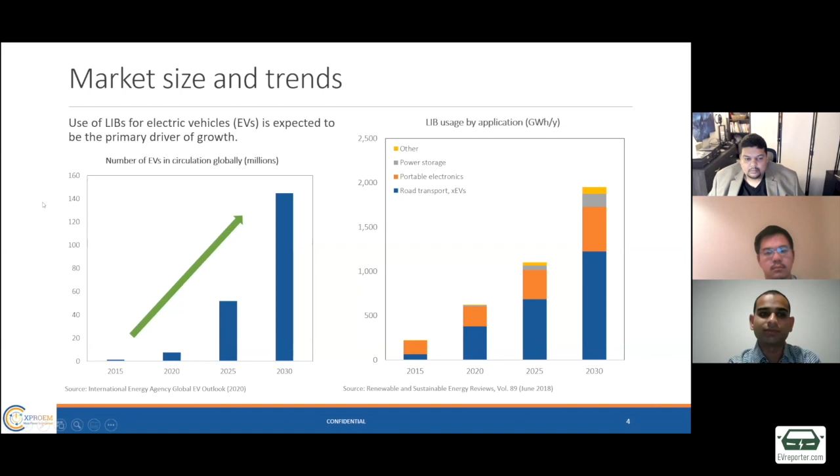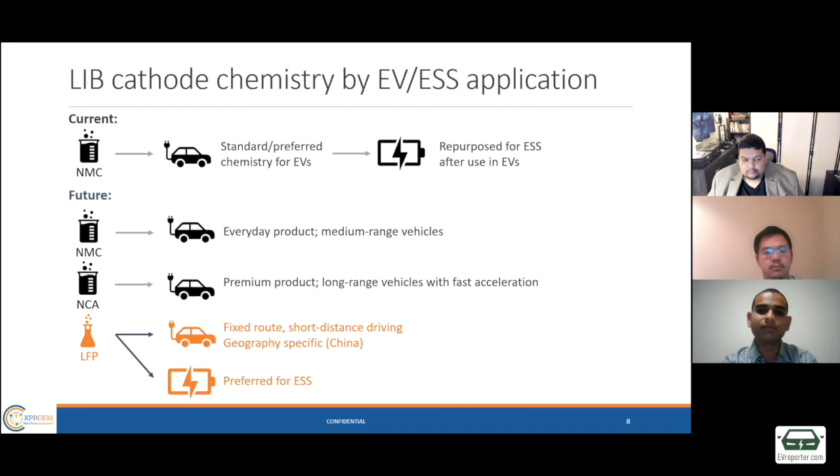LFP is more for fixed route, short distance driving and commercial vehicles like buses or trucks. And then it's kind of geography specific as well. So right now, a lot of the uses of LFP are in China, and they've shown that this does work for a bunch of applications as well. But it is a preferred solution for energy storage, and this is where the major growth in LFP is expected to be.

So speaking of the energy storage solutions, like I mentioned earlier, the EV application used for LFP is mainly in China. But there is increasing use and adoption of LFP for energy storage. Generally, they used to use used EV batteries and repurpose them, refurbish them. And then because of a shortage of NMC batteries for these storage applications, one, because they're needed and used in regular EV solutions, but also because you need to wait for them to reach their end of life before you repurpose them, what they're finding is for energy storage solutions, it's better and has been more useful to have LFP in these solutions.

And so it's poised to overtake NMC as the dominant stationary storage chemistry of choice. I expect it to be over 30% of the market in this space for ESS in 2030. So I'll just summarize my points briefly. Obviously, we'll have a Q&A after where we can have a bit more of a chat.

Like I discussed, the use of lithium-ion batteries in electric vehicle applications is expected to be the primary driver of growth. However, LFP use there is expected to grow and especially dominate in ESS, or energy storage solution applications, because of its low price on a dollar per kilowatt hour level, its long lifespan, and its increased safety performance. So for this LFP market, while the overall share seems to be stabilized or dropping over time, the market size is still forecast to grow quite strongly in the coming years.

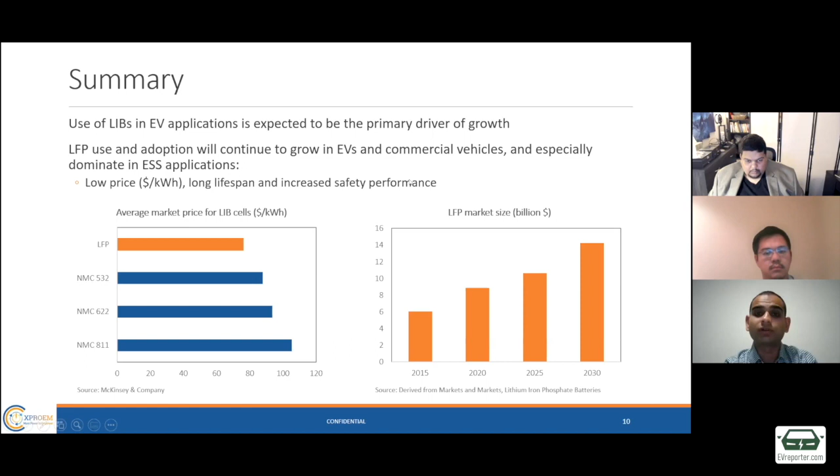And with that, I'll be happy to pass it on to Brett, who will discuss a little bit more about some of the challenges facing LFP.

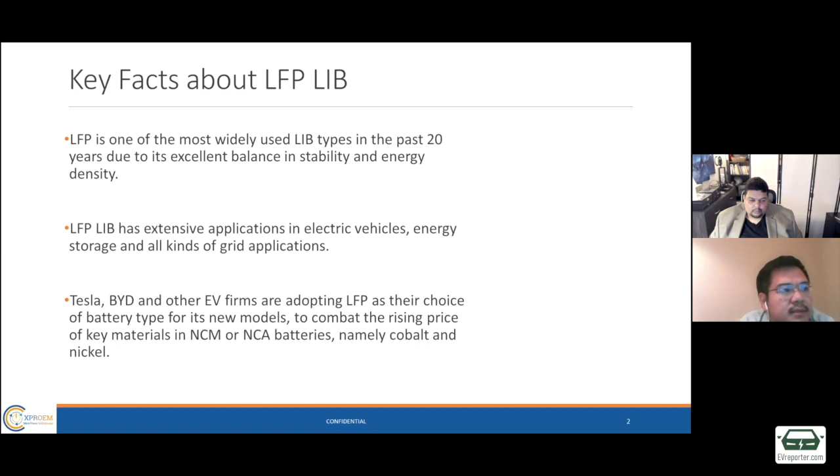So I single out LFP and NMC/NCA for a quick comparison. This was already talked about by Nishit, but it's good to understand that LFP, despite the criticism, is a very comparable battery. Not in the way that it is similar to NMC, but in how you can apply it and how it can help different applications; that shouldn't be ignored.

For example, energy density is lower and the charging speed is slower, but stability and durability are the two factors I was trying to emphasize here. Especially durability, because we've seen batteries' capacity degrade over time, especially with fast charging applications.

And LFP has a better resistance to fast charging due to its chemistry. So I think that's something we all need to understand when we put these two on the table to compare. And the price, of course, LFP is cheaper.

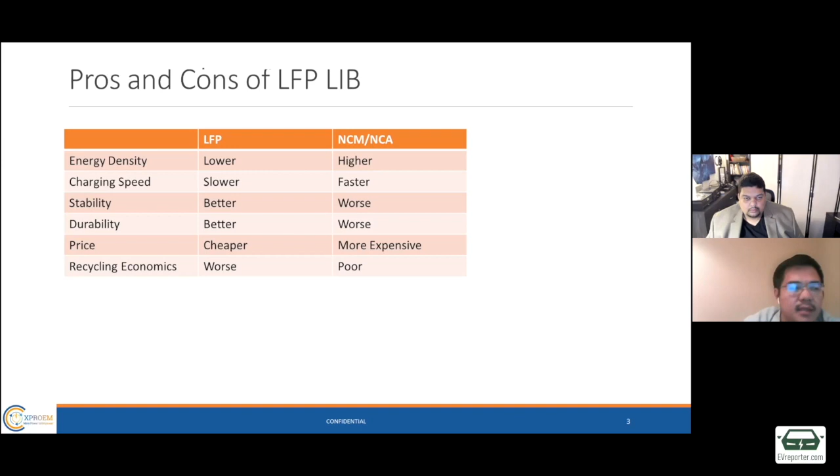And the last point I want to touch on is recycling economics. So this is a later-stage complication that a lot of people don't really try to understand at first when they pick the application. But as of yet, LFP actually has much worse recycling economics compared to NMC. I'll get more into that later, but this is the conclusion for that comparison.

So when we look at recycling economics, it's nothing really mysterious. It's looking at the different components we could extract from the used battery. And here I'm using the hydrometallurgy process and the products derived from it for direct comparison, because that has been the predominant application worldwide at this point, which is the status quo. So we can see that both contain lithium, so we will have lithium carbonate as the common

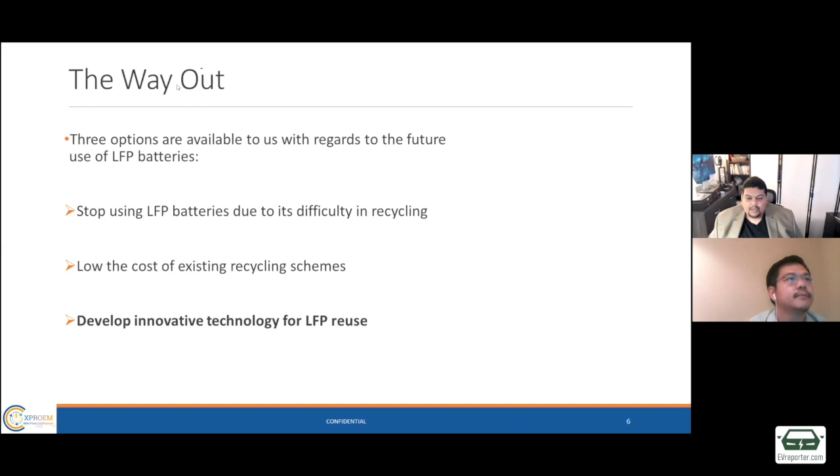Okay, well, thank you, Brett. I think both my colleagues, Nishit and Brett, have set the right tone, talking about the market and some of the challenges. So I'll just share my screen.

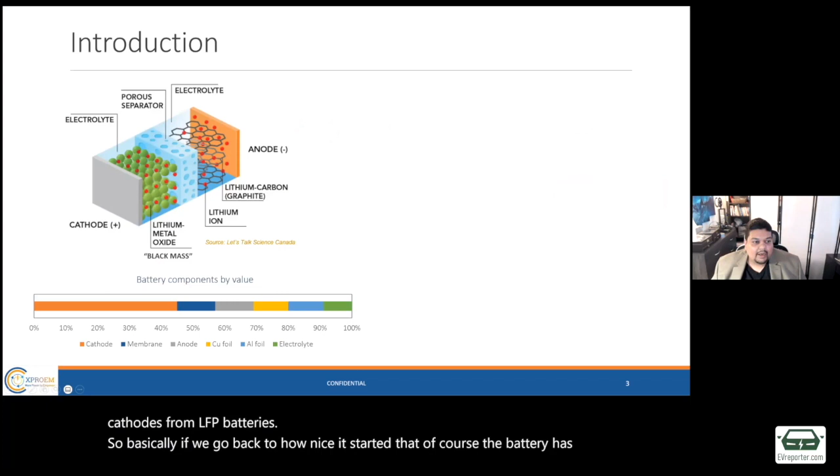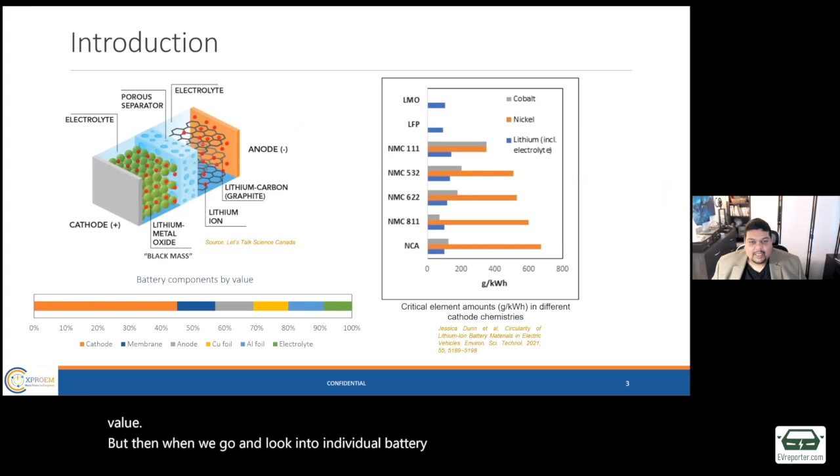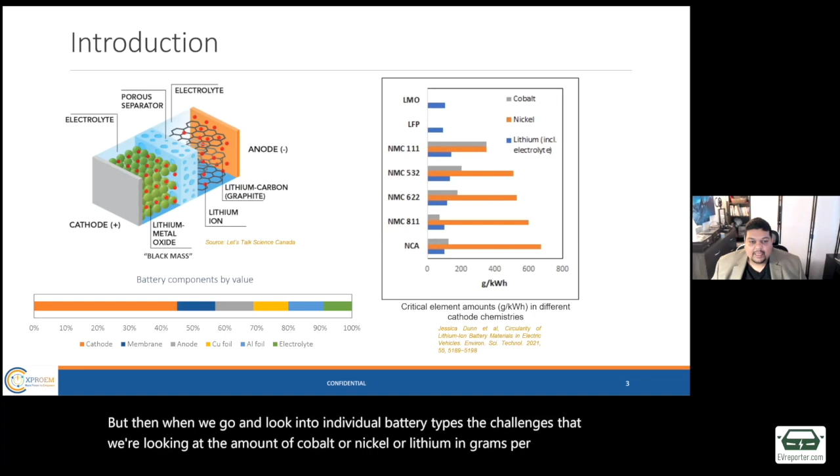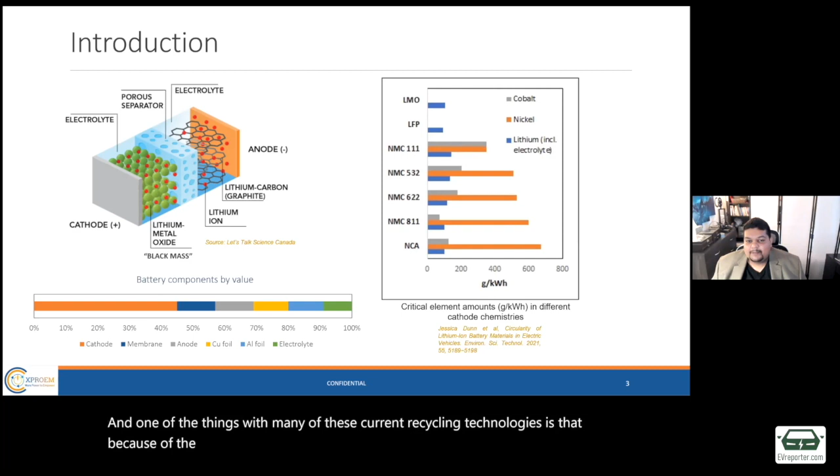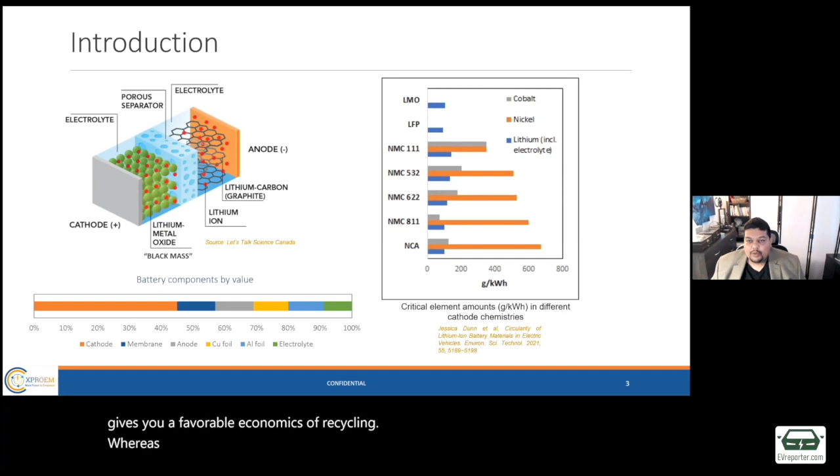But when we look into individual battery types, we are looking at the amount of cobalt, nickel, or lithium in grams per kilowatt hour. When we come to LFP, we don't have any nickel and cobalt. With many current recycling technologies, the presence of nickel and cobalt and the ability to recover them gives you favorable recycling economics, whereas for LFP we don't have it. So the question is, how can we recycle this economically? And if we cannot, other than repurposing, what else can we do in an innovative way to create a sustainable solution for handling used LFP-type batteries?

When we talk about restoration or recycling, recycling has been the more predominant term because we were dealing with batteries with ternary compositions and so on. But eventually LFPs, and future LIB types such as lithium sulfur and lithium air, will also require proper handling and treatment after decommissioning. None of them will have cobalt and nickel. So how can we do something for these types of batteries after their end of life?

I think one of the key questions from a material science point of view is how we can restore cathodes back to their original electrical performance and skip the recycling of individual components altogether. I think this is the time to start thinking in this direction. And this direction means it will become a more intricate process, with focus on repairing the microstructure of the spent battery component.

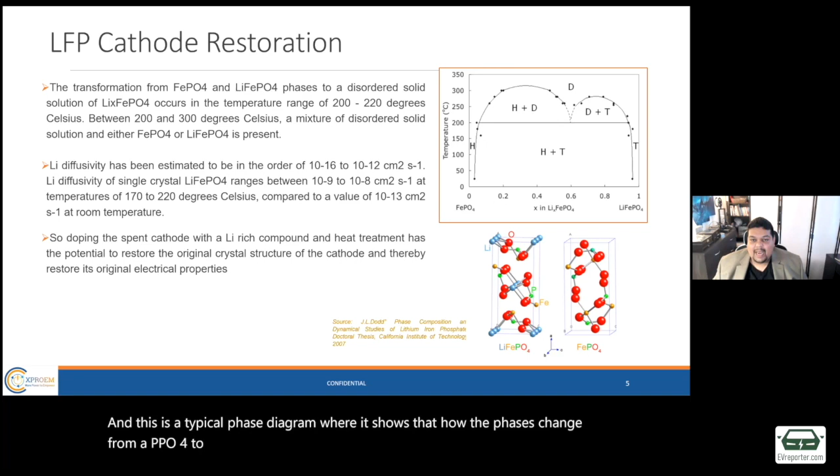So what happens is this lithium depleted crystal, now if we want to restore it back to its original electrical properties, we have to find a way to bring the lithium back into this structure. And this is a typical phase diagram where it shows how the phases change from FePO4 to LiFePO4 by the addition of lithium.

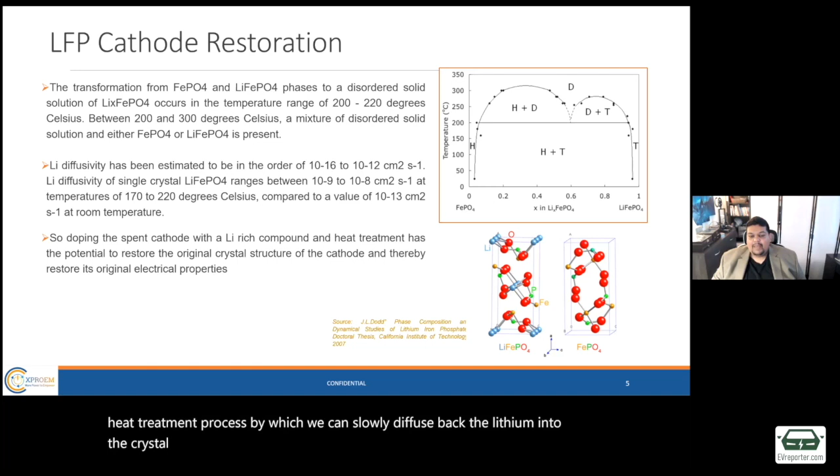So the thing here is that we have to find a way so that we could mix the used battery with some lithium bearing compound, and then we will try to find a heat treatment process by which we can slowly diffuse back the lithium into the crystal. And by this way, we will be able to restore the electrical properties of the spent cathode. Now, even if we cannot achieve 100% restoration, a restoration of 90% or 95% will still be a very welcome step in the right direction.

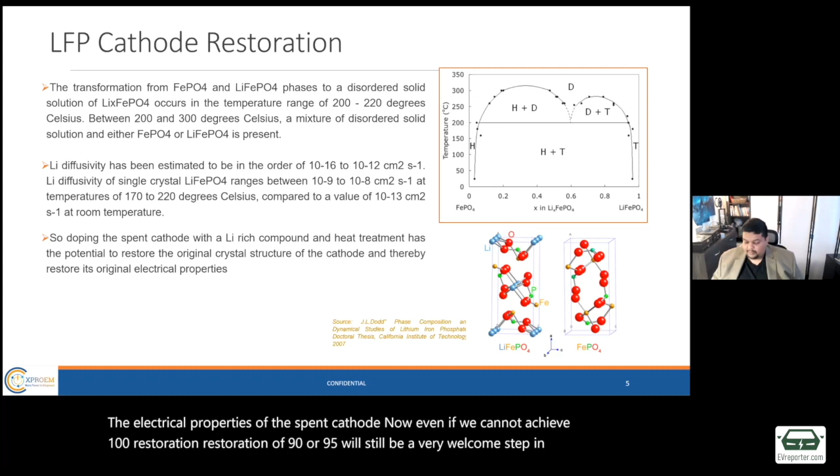So basically, for the LFP cathode, it is important to re-establish the proper stoichiometric ratio of lithium in the used LFP cathode. And for this, we have developed a solid state diffusion process, which is known as the D3R process technology, which stands for diffusion driven doping restoration.

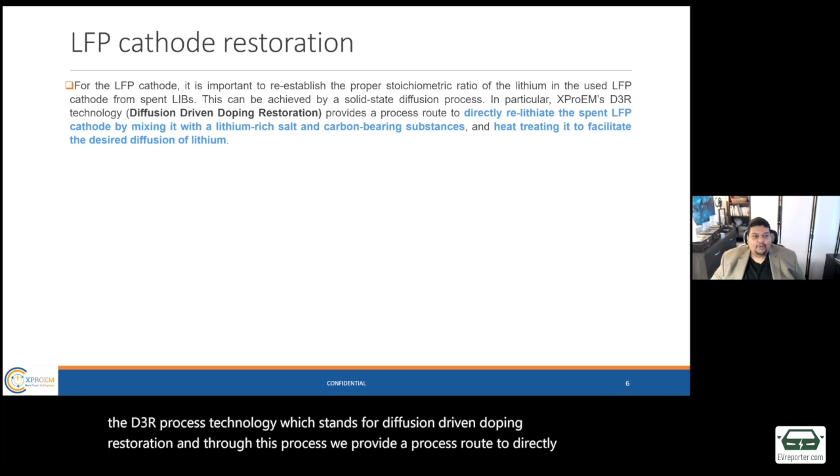And through this process, we provide a process route to directly re-lithiate the spent LFP cathode by mixing it with a lithium-rich salt and carbon-bearing substance. And then we heat treat it to facilitate the desired diffusion of lithium back into the crystal.

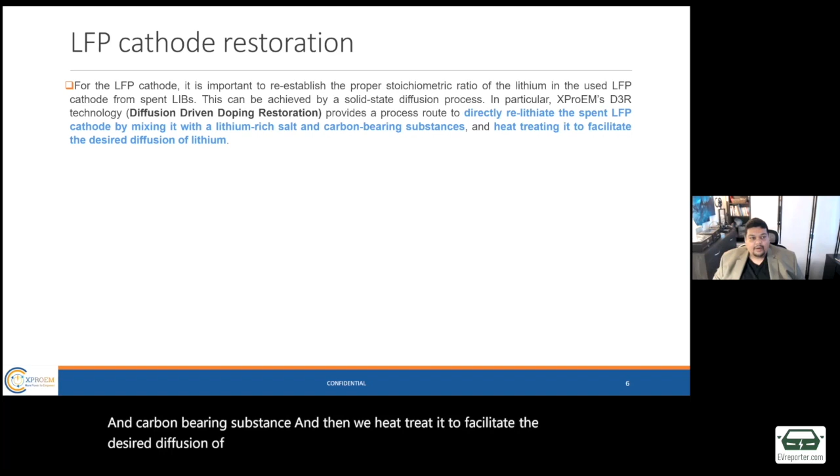So what happens first is we take the cathodic black mass from spent LFP batteries, and it's first preheated in a reactor at an intermediate temperature that allows to homogenize the phases. After the homogenization, we add the lithium bearing compound and some carbon bearing substance, and we use a fine milling equipment and subsequently grind them to reach homogeneity.

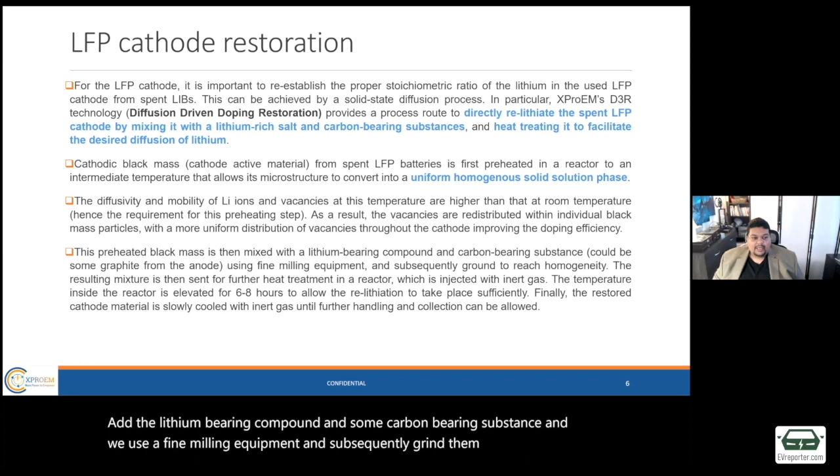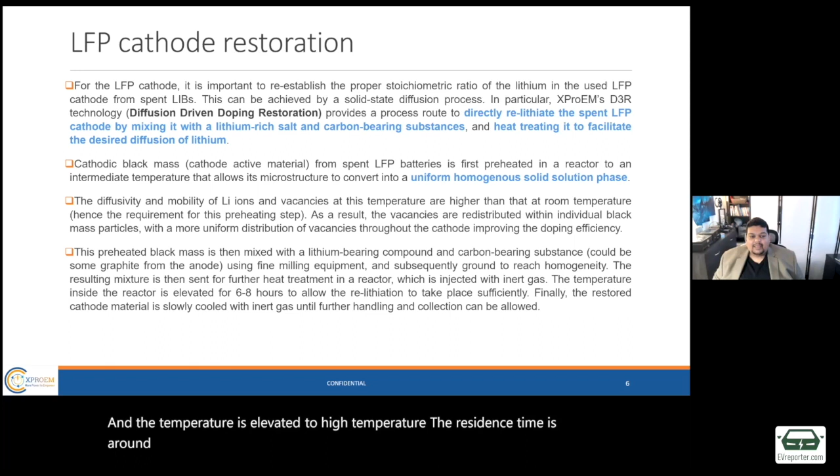Then the resulting mixture is heat treated in an inert atmosphere, and the temperature is elevated to high temperature. The residence time is around 6 to 8 hours. And then the relithiation can take place efficiently. And then finally, the restored cathode material is slowly cooled under inert gas conditions, and the collection is allowed.

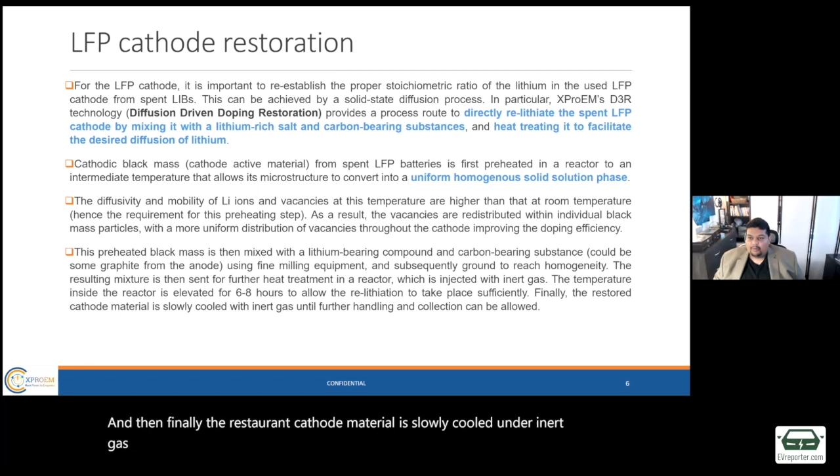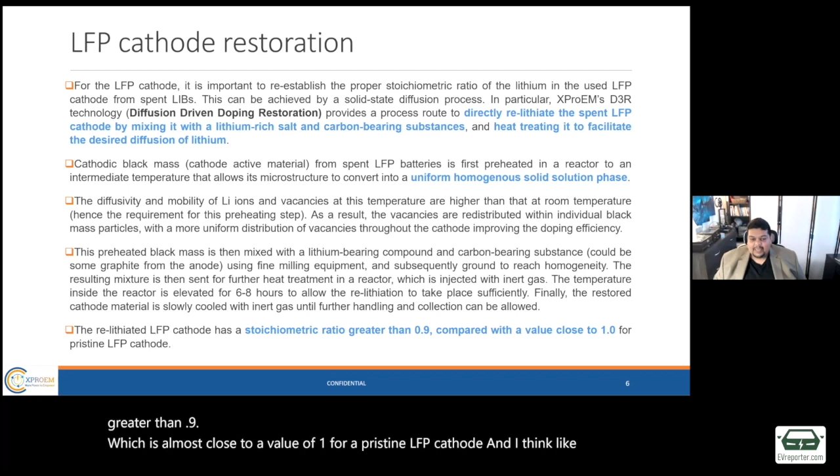So the relithiated LFP cathodes can have a stoichiometric ratio greater than 0.9, which is almost close to a value of 1 for a pristine LFP cathode. And like I said, a 90% restoration can be a very welcome step in this direction.

So in this way, without trying to recover the individual components or trying to recover lithium carbonate, we are just directly restoring the cathode, and this cathode can be reused in a battery pack, and that can solve the economic problems, because now we don't have to worry about individual component recycling.

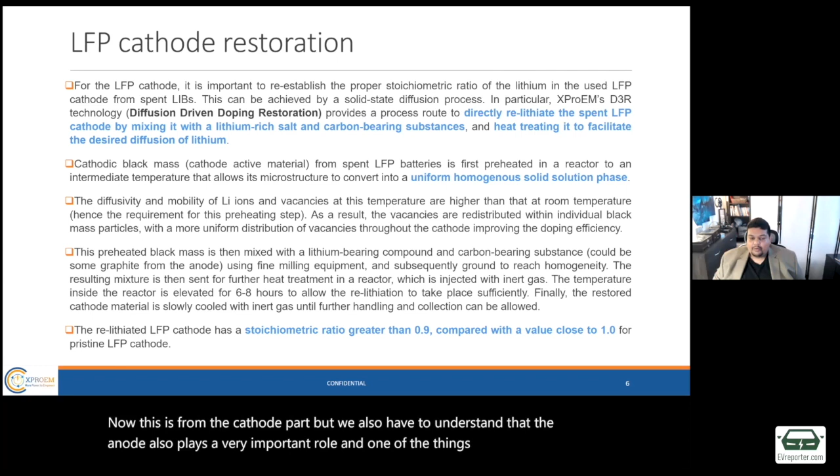Now, this is from the cathode part, but we also have to understand that the anode also plays a very important role. And one of the things we thought is very important is to understand the nature of graphite. So if we look at graphite, there are really two kinds of graphite used in anodes for lithium-ion batteries. One is natural graphite, often noted by NG or NFG, which is natural flake graphite, and then synthetic graphite.

So synthetic graphite is used specifically in electric vehicle applications because of its higher purity and quality, and of course it's a little costlier. And then natural graphite is typically used for batteries for portable electronics, because they don't have the requirement of a very long cycle life.

Now, because of the high demands in batteries, because of electric vehicles and energy storage systems, the demand for graphite is also very high, and the demand for both natural graphite and synthetic graphite will keep on increasing. And the problem here is that graphite is already considered as a critical raw material.

So because it's a critical raw material, we also anticipate there will be some supply shortages. So then the rest of it should be taken care of by synthetic graphite. And in fact, in 2020, synthetic graphite contributed to almost 60% of the total global graphite market.

Now, again, the cost of synthetic graphite is a little bit of an issue, because it's almost 2 to 3 times higher than natural graphite for the same quality. So we believe that restoring the anode becomes equally critical, because yes, the cathode has value, but if graphite shortage and the price of graphite become a challenge, I think restoring the anode would also be a welcome step. So if we could restore both the cathode and the anode together.

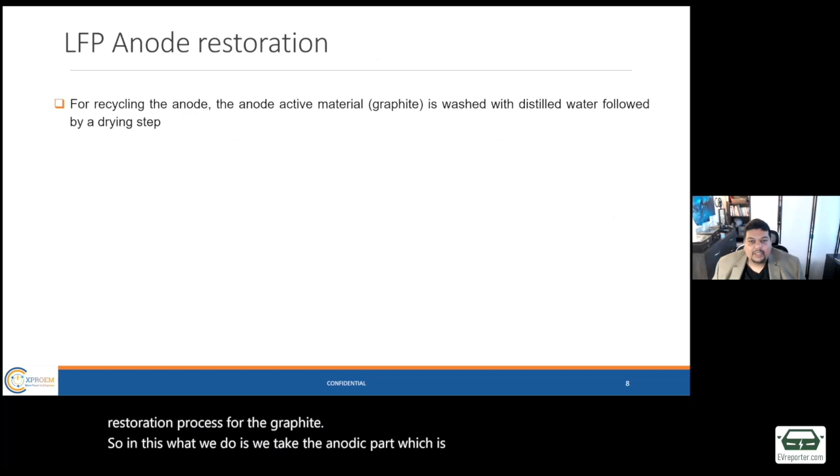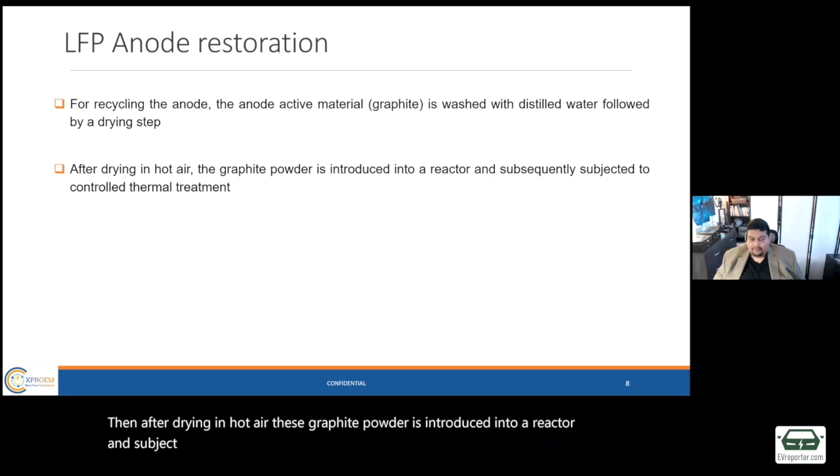So under this D3R technology, we have also created a restoration process for the graphite. In this, we take the anodic part, which is the graphite, and we wash it with distilled water, followed by a drying step. After drying in hot air, this graphite powder is introduced into a reactor and subjected to controlled thermal treatment. The thermal treatment activates a regraphitization process under a continuous flow of inert gas. Then the graphite powder product is slowly cooled after the completion of the heat treatment. And this way, with this regraphitization process, we are also able to recover the anode.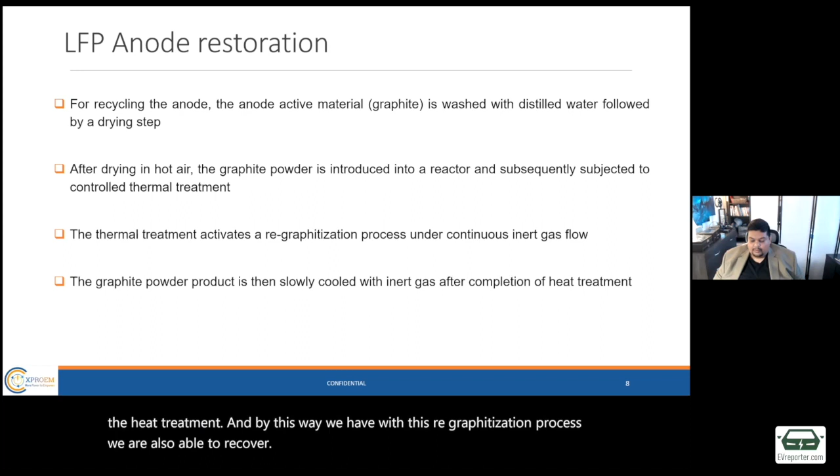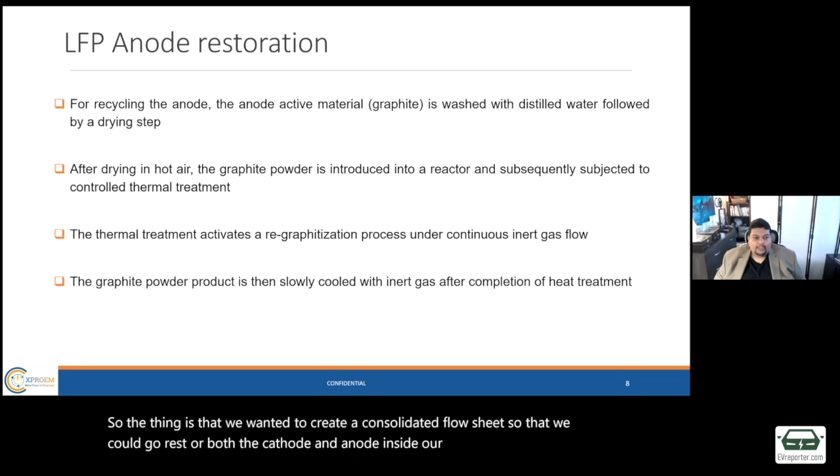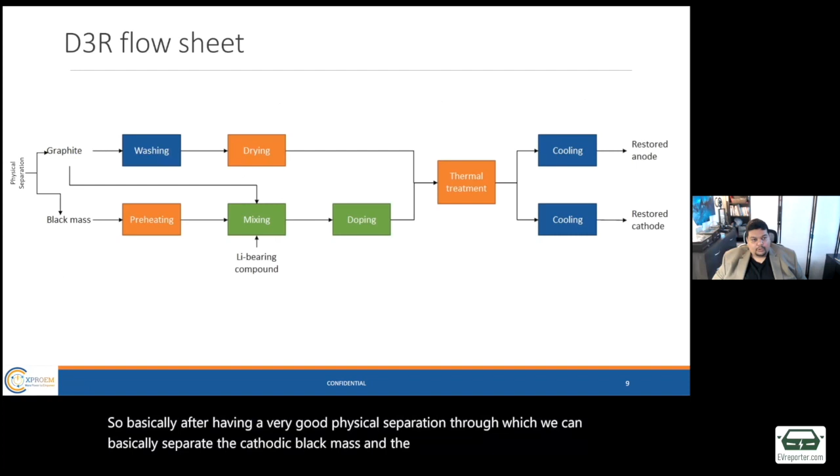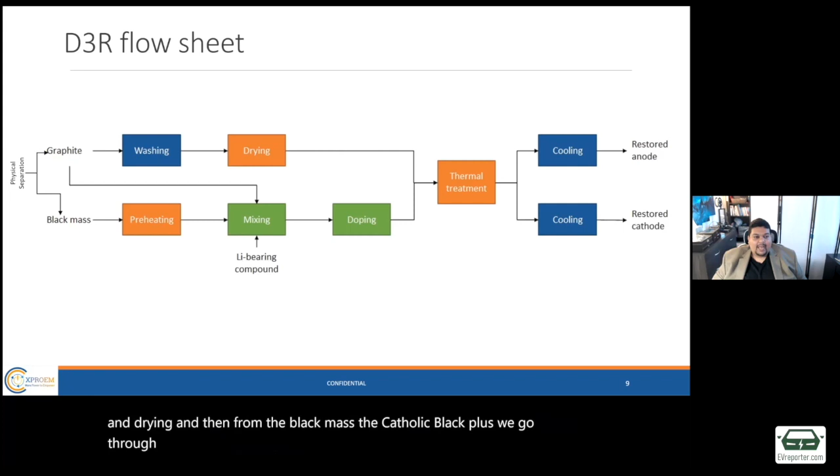So we wanted to create a consolidated flow sheet so that we could co-restore both the cathode and the anode inside our D3R technology. Basically, after a very good physical separation through which we separate the cathodic black mass and the graphite, we go through a couple of phases. For the graphite, we go through washing and drying. For the cathodic black mass, we go through preheating, then mixing, where we bring in the lithium-bearing compound, which could be a salt, and then of course some doping.

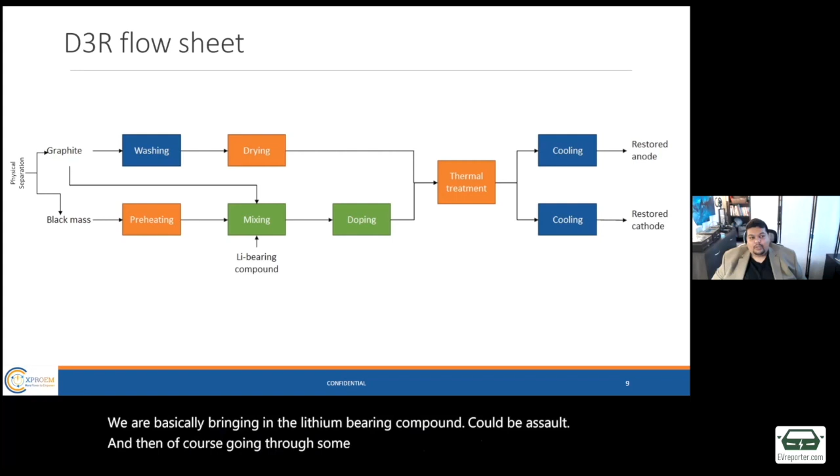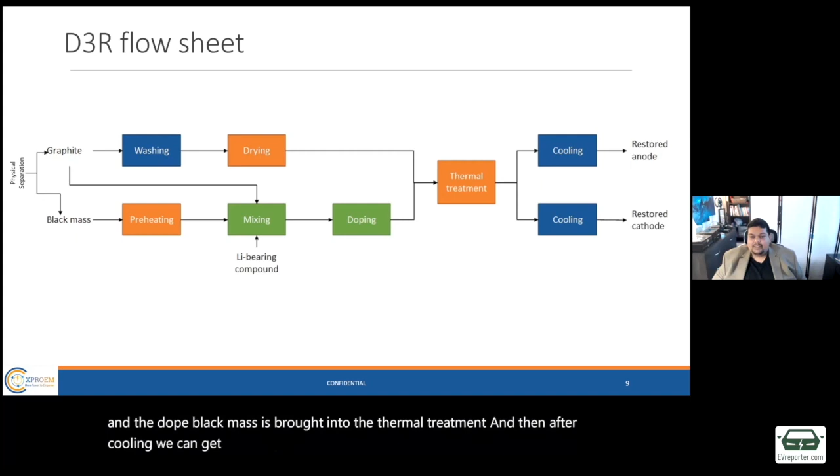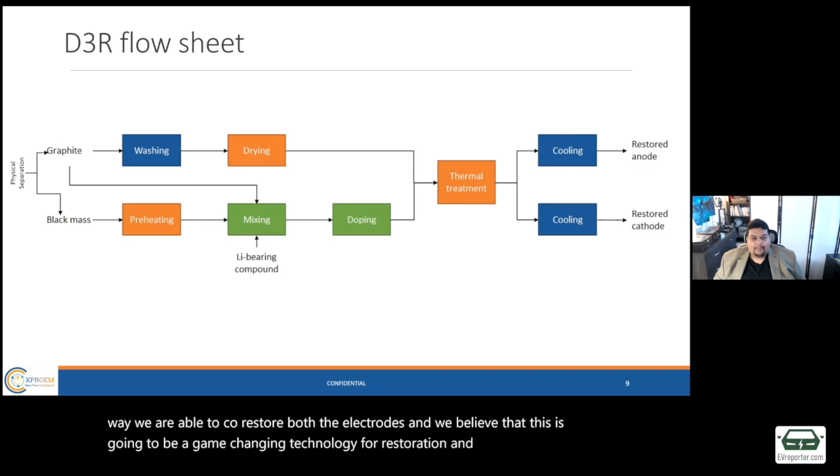And finally, both the graphite and the doped black mass are brought into the thermal treatment. After cooling, we get the restored anode as well as the restored cathode. So in this way, we are able to co-restore both electrodes. We believe this is going to be a game-changing technology for restoration, and through this idea we are also coming up with ideas for other future types of lithium-ion batteries.

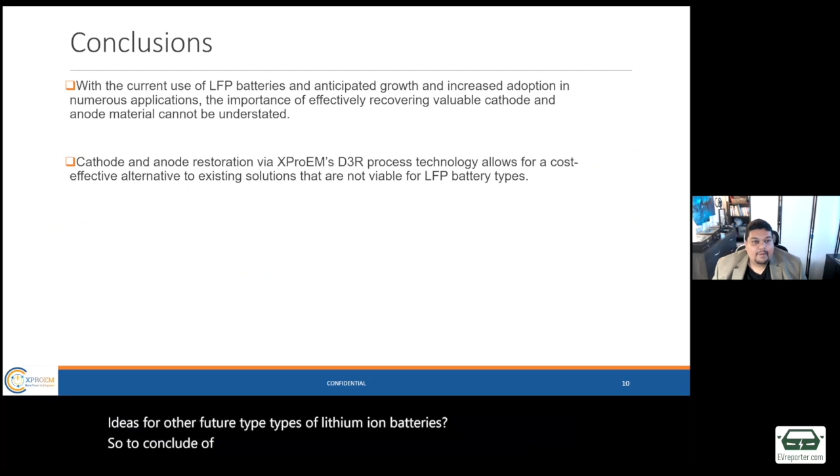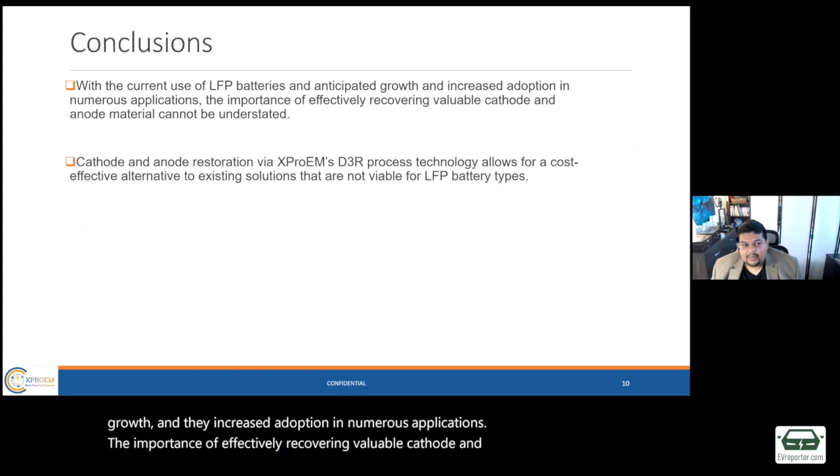So to conclude, with the current use of LFP batteries and the anticipated growth and increased adoption in numerous applications, the importance of effectively recovering valuable cathode and anode material cannot be understated. Cathode and anode restoration via XProEM's D3R process technology allows for a cost-effective alternative to existing solutions that are not viable for LFP battery types.

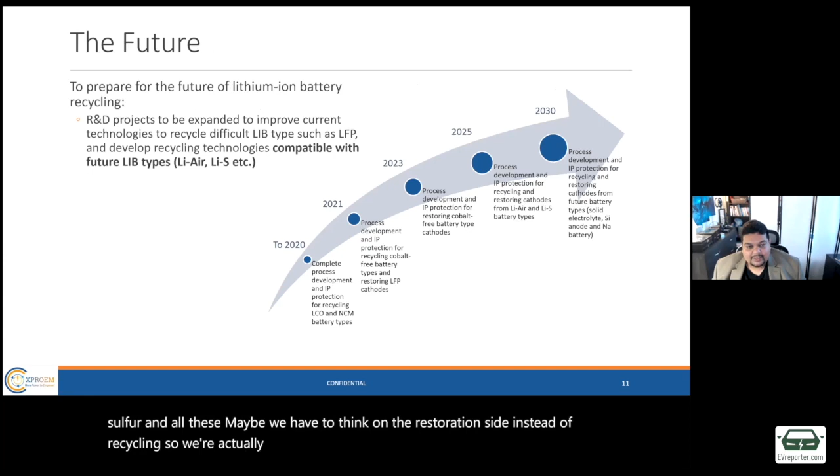And finally, before wrapping up, I wanted to mention again that there will be future LIB types such as lithium-air and lithium-sulfur, and for all these, maybe we have to think about restoration instead of recycling. So we are developing a pipeline of projects, and we really want to be the leaders in restoration technology for all these future LIB types. That's why we have a very busy agenda for the next 9 to 10 years.

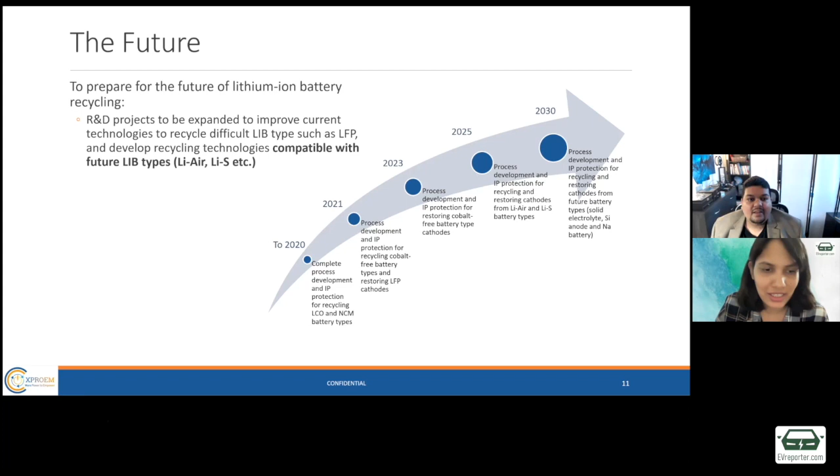So we still have a good 20 minutes for the Q&A session, and I will take the questions from the Q&A box first. There is one question from Mr. Menon, asking: won't a reagent or chemical having more affinity towards the metal to be extracted make the recovery economical?

Well, if you look at the process, the chemistries are very, very complicated, right? It's not going to be just one simple reagent which can capture one metal away. These are all complicated chemistries, so people have been struggling to develop simple solutions, and that's why hydrometallurgy became very popular.

The challenge with hydrometallurgy is that things are not economical, because you have to use a lot of acids, bases and organic solvents, and then you have wastewater generated. All these add to the cost. So even if the reagent may be easy to use, all the supplementary things around it make the process very costly. Okay. Yeah, I would like to add to that too. Affinity or attachment is just one step in recycling or recovering.